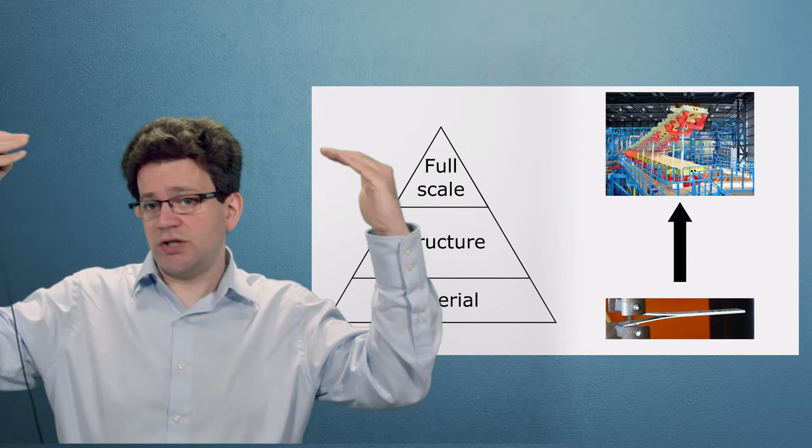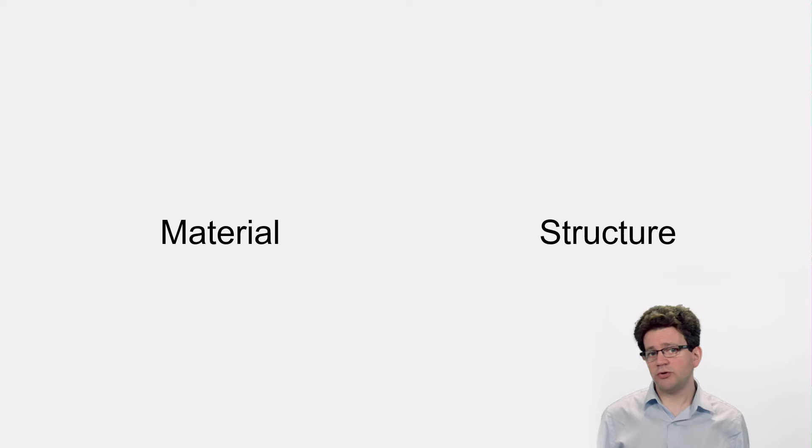Now you might say, we already know how to do certification. We have a tried and trusted building block approach, where we start by qualifying materials, then we move up to structural elements, and eventually we end up at full-scale structures. But this approach is going to become too cumbersome to use in future. Why? Well, if you look at ongoing developments, what you see is that the distinction between structures and materials is blurring.

Think, for example, of additive manufacturing, where you make your part and your material at the same time. And the part's microstructure will depend on details such as where on the build plate you made your part and what other parts you are making at the same time. Think of optimized layups and automated fibre placement, where you continuously vary your fibre orientation, effectively creating hundreds or thousands of different layups in a single structure.

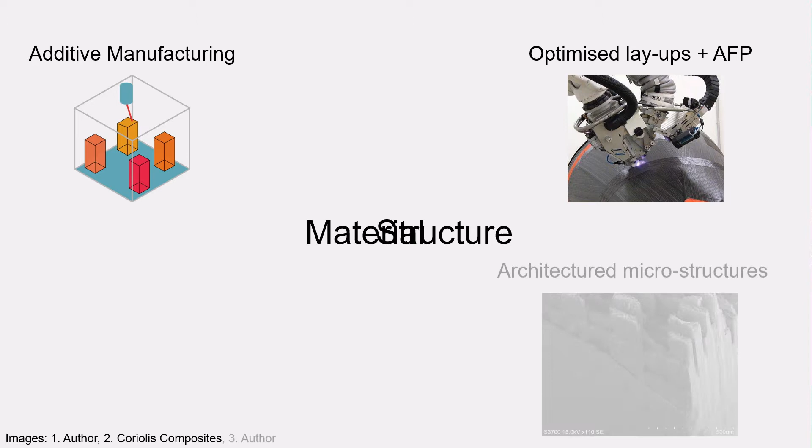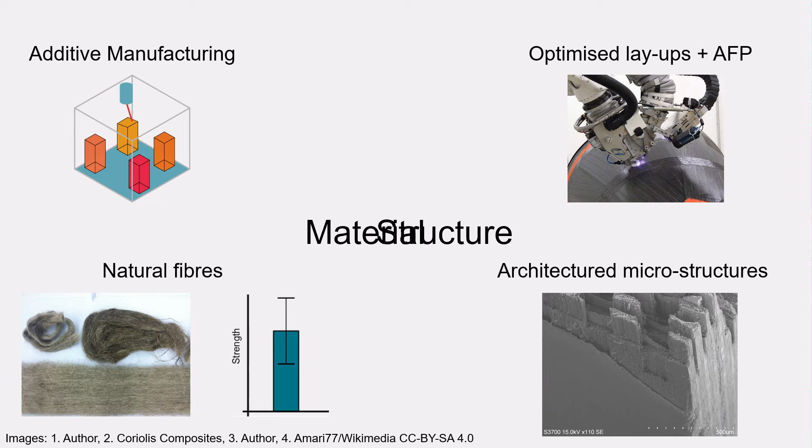Think of architectured microstructures, where we intentionally vary the microstructure throughout the part. Or think of natural fibres, where the properties vary from batch to batch and from growing season to growing season, almost giving you a different material each time. If you want to certify these concepts with the building block approach, then you effectively have hundreds or thousands of materials per part, which you would have to qualify individually. Now obviously that will take far too much time and effort.

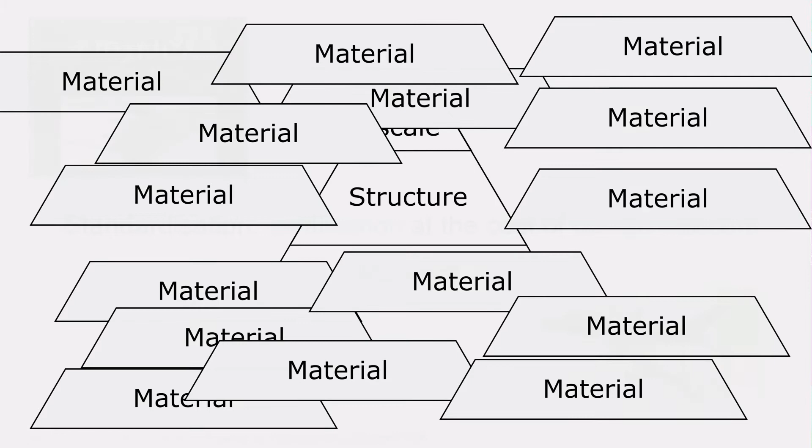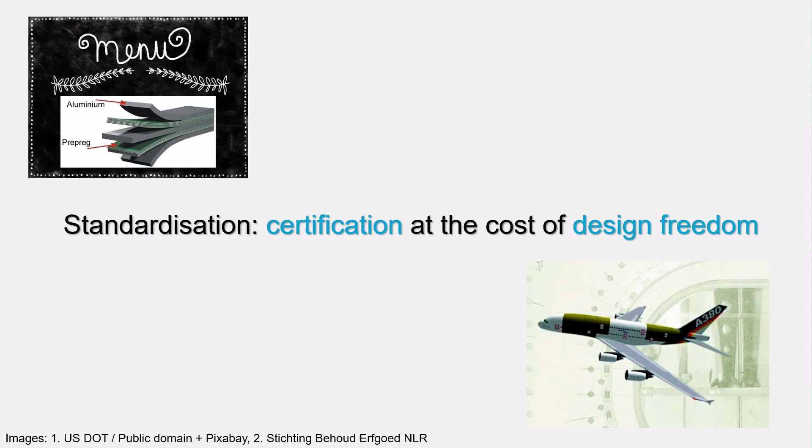We saw this problem before when we introduced composites and fibre metal laminates. There we solved the issue by standardization, limiting designers to a small menu of qualified layups. Certification was achieved, but in retrospect we can see it came at the cost of design freedom. If we want that freedom back, to profit from emerging material and structure technologies, then we need a different approach. The solution is to certify based on the performance of what is actually built.

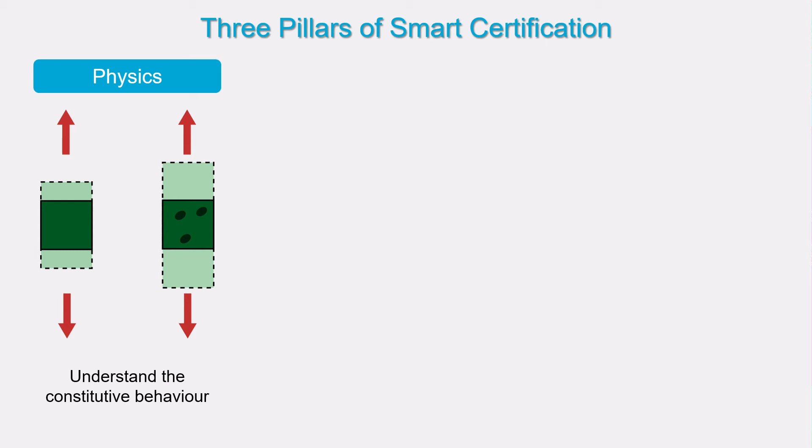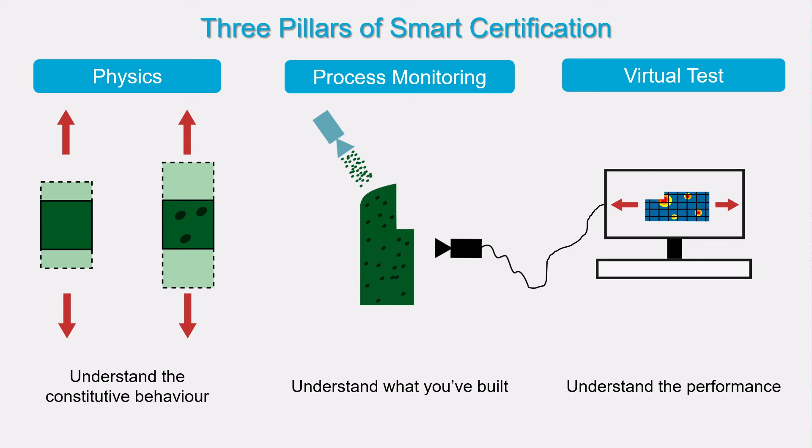And there are three pillars to the smarter certification approach. The first is to have an understanding of the underlying constitutive behavior of the material and of defects in the material. Secondly, we need to use sensors and process monitoring to understand what the state is of the parts that we have actually built. What microstructures and defects do they contain? With this information, we can subject the parts to the third pillar, virtual testing, to understand the performance not just of a sample from a batch of parts, but of each individual part that we have built, so we can be assured that it meets the requirements.

To sum up, the distinction between material and structure is blurring. And the solution is to use physics, process monitoring, and simulation-based acceptance to understand the performance of the part as built. By adopting this new certification approach, we can reduce the time and cost to certify new parts and materials and ensure they are available when we need them.